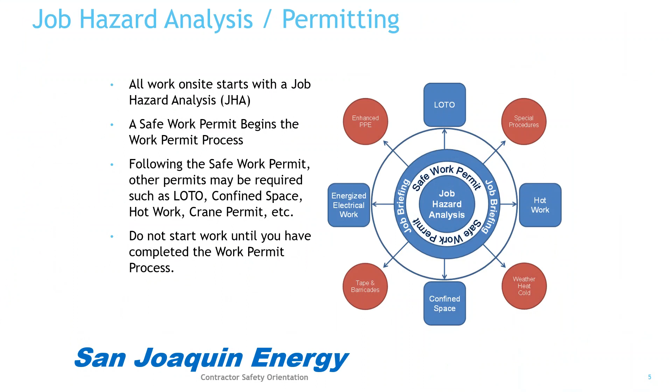Lockout-tagout. Do not operate any isolation devices that have a lockout-tagout tag on them. Only trained and authorized persons may perform and exercise control over lockout-tagout activities. Before starting work on any locked-out equipment, a representative from each contractor must sign on to the lockout-tagout.

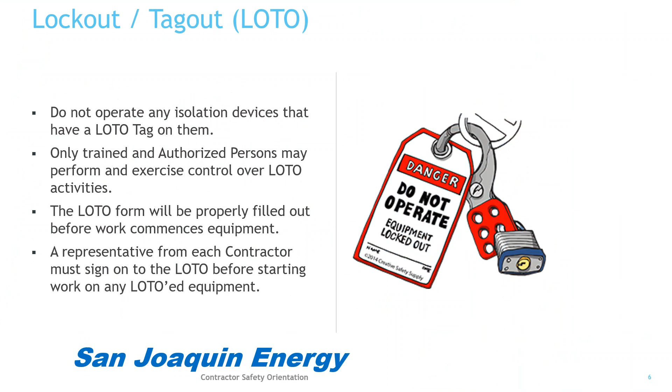Hot work permits. Obtain a hot work permit from the Control Room if the job requires welding, burning, grinding, or any other spark-producing activity. The permit is valid for a maximum of 1 shift or 12 hours, whichever is shorter. Review the hot work permit safety requirements before starting the work task.

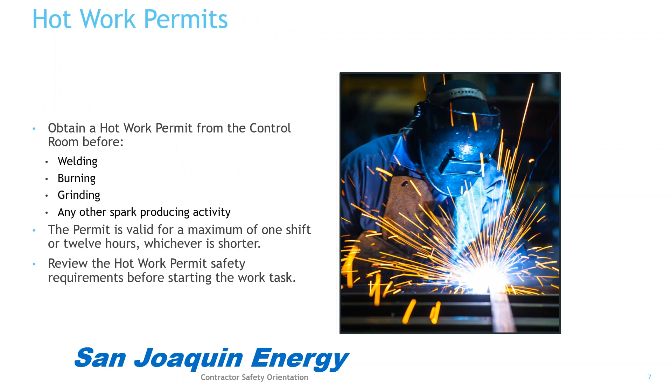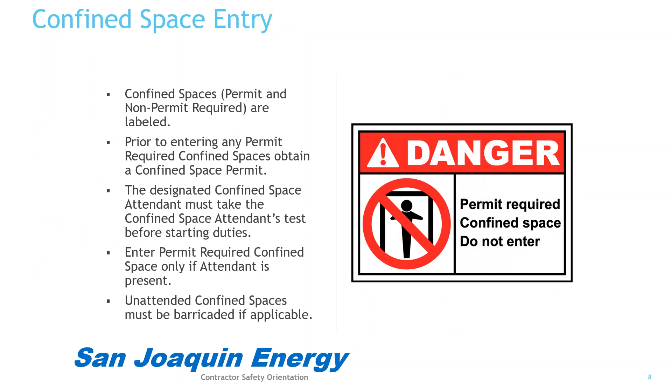Confined space entry. Confined spaces, permit and non-permit required, are labeled. Prior to entering any permit-required confined space, obtain a confined space permit. The designated confined space attendant must pass the confined space attendant's test before starting duties. Enter permit-required confined space only if attendant is present. Unattended confined spaces must be barricaded.

Personal protective equipment. Workers must provide their own PPE. Be properly trained on PPE. Use and maintain PPE in a sanitary and reliable condition. Workers and visitors must wear at a minimum the following PPE while in the power block: hard hat, safety glasses, steel composite-toed boots or shoes, hearing protection.

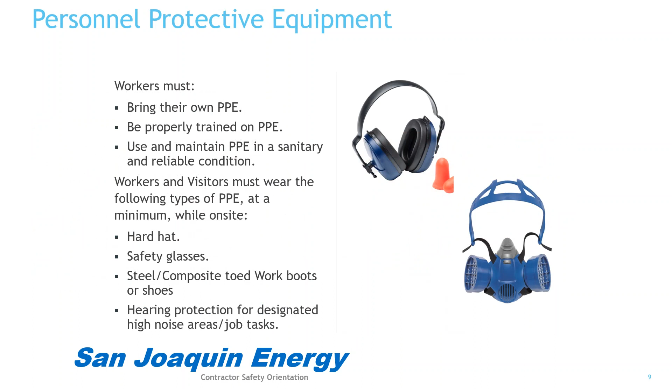Hazardous materials. San Joaquin Energy makes the following information available to workers: hazardous materials PPE requirements, access to MSDS, labeling systems for hazardous materials, emergency procedures, spill response procedures. Workers who bring hazardous materials on site must provide an MSDS to the Control Authority.

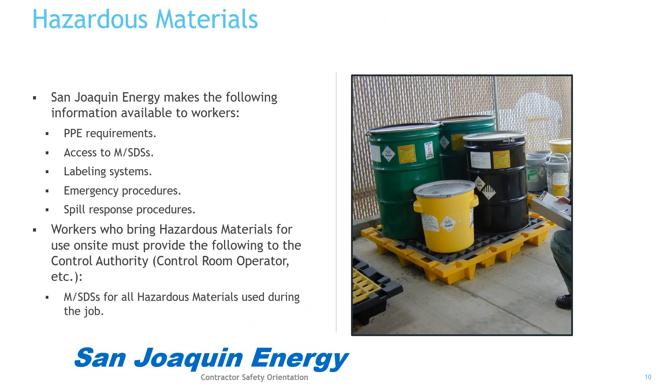Electrical safety. An energized electrical work permit is required for energized electrical work. Damaged electrical tools and cords must not be used. Ground fault circuit interrupters must be used whenever plugging into non-GFCI outlets. Tools must be unplugged when not in use. Electrical cords must be elevated off the ground whenever possible

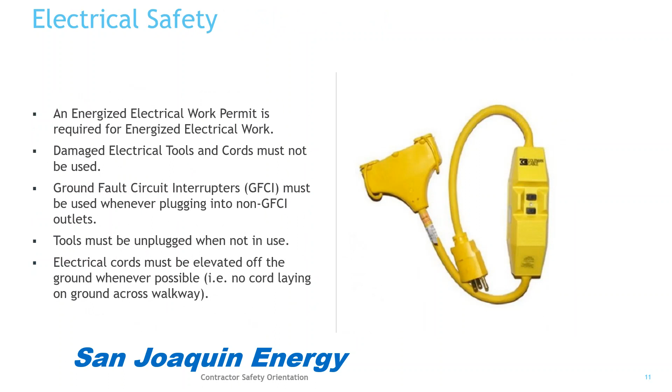to prevent a tripping hazard. Fall protection. Fall protection PPE must be worn when working more than 4 feet above ground if there is no guardrails or other built-in fall protection. Contractors must provide their own fall protection equipment and must inspect before each use.

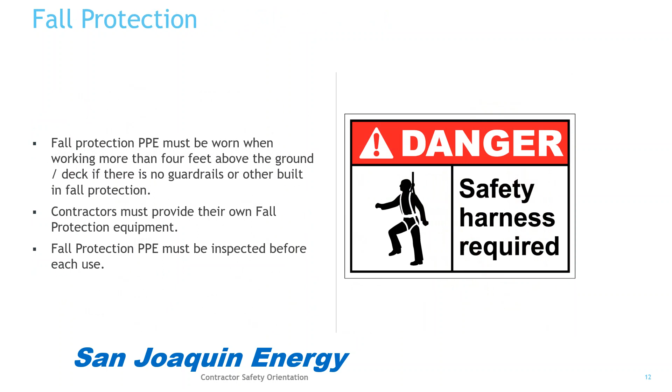Ladder safety. Only fiberglass ladders are allowed on site. Wood and metal ladders are prohibited. Ladders must be inspected before each use. They must be tall enough for the job, and ladders must be used properly. No standing on the top cap and rung, no overreaching, and maintain 3 points of contact when climbing.

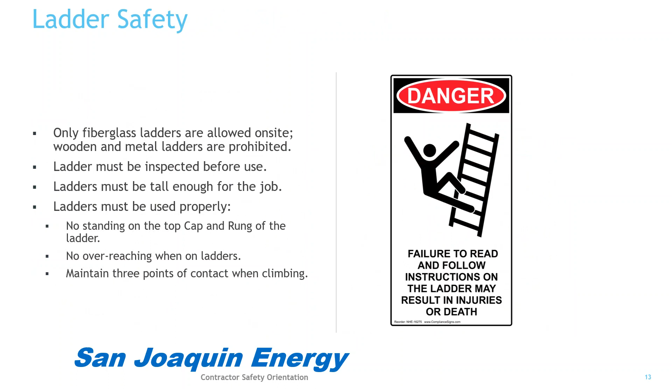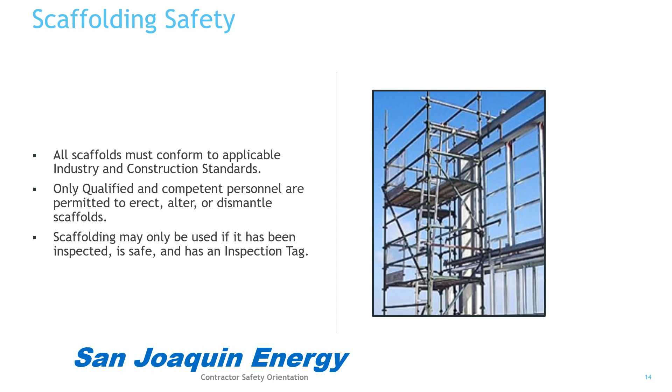Scaffolding safety. All scaffolds must conform to applicable industry and construction standards. Only qualified and competent personnel are permitted to erect, alter, or dismantle scaffolds. Scaffolding may only be used after it has been inspected, is safe, and has an inspection tag.

Safe lifting. When lifting heavy objects, personnel must not lift or carry heavy objects alone. Use appropriate tools for the job.

Barricades must be used to control access to hazardous areas. Red danger or yellow caution tape is used at San Joaquin Energy facilities. Barricade tape is a warning of a temporary hazard. Do not enter a barricaded area unless you are involved in a particular task and are signed on to the work permit. Identify what type of barricade may be required for a particular work task.

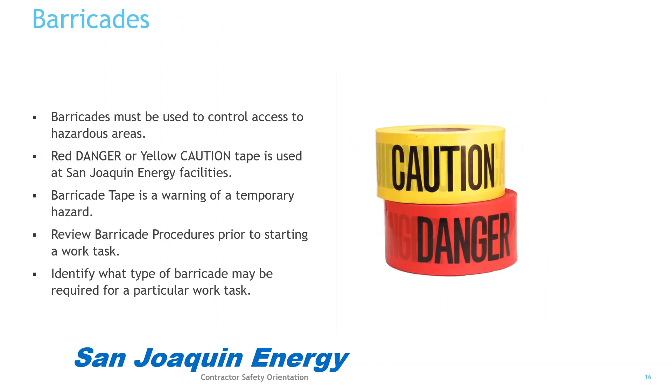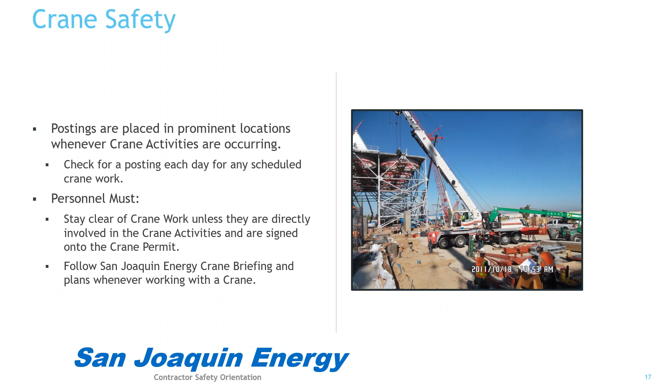Crane safety. Postings are placed in prominent locations whenever crane activities are occurring. Check postings each day for any scheduled crane work. Personnel must stay clear of crane work unless they are directly involved in the crane activity and are signed on to the crane permit. Follow San Joaquin Energy crane briefing and plans whenever working with a crane.

Mobile equipment. Non-San Joaquin Energy employees are not allowed to operate San Joaquin Energy-owned mobile equipment without express permission of San Joaquin Energy Management. Contractor-provided mobile equipment must be certified to meet all applicable regulations. Mobile equipment operators must provide San Joaquin Energy with proof of training prior to operating any mobile equipment on site.

Accident and incident reporting. All accidents, incidents, and near misses must be reported to the control authority.

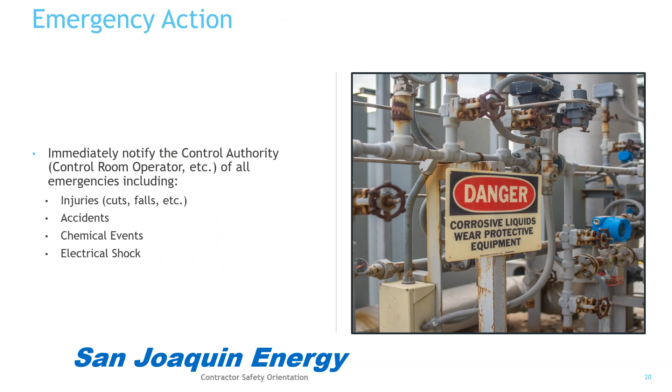Emergency action. Immediately notify the control authority of all emergencies, including injuries, accidents, chemical events, fire, or electrical shock.

Evacuation. An evacuation may be required in the following situations: fire or explosion, hazardous materials release, or bomb threat. An on-off repeated pattern from the general alarm horn indicates there is an evacuation required. Head to your site's evacuation muster location and follow instructions from San Joaquin Energy personnel. A continuous horn blast for 10 seconds indicates the alarm is clear.

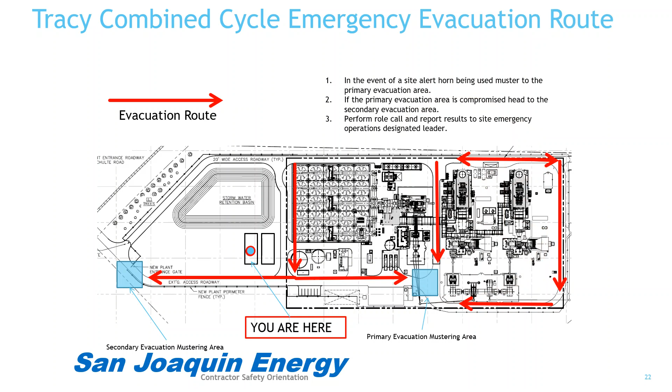First aid. First aid kits are on site and available. AEDs are on site and San Joaquin Energy personnel are trained in their use. Notify your supervisor and the control authority if anything occurs that requires first aid response.

Emergency procedures for chemical exposure. Be aware of locations of eye wash stations and safety showers in your area. Keep a clear path to eye wash stations and safety showers. Immediately remove contaminated clothing in the event of a chemical exposure and flush the affected area with water for at least 15 minutes. Notify your supervisor and control authority as soon as possible.

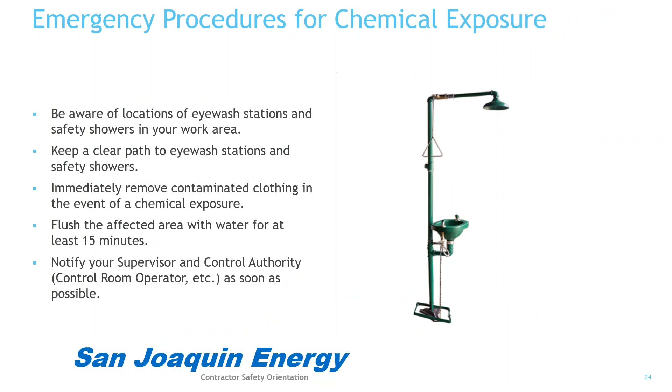Thermal extremes. Heat stress. Know the signs and symptoms of heat stress. Look out for your coworkers. Drink plenty of fluids and take short breaks in cool or shaded areas.

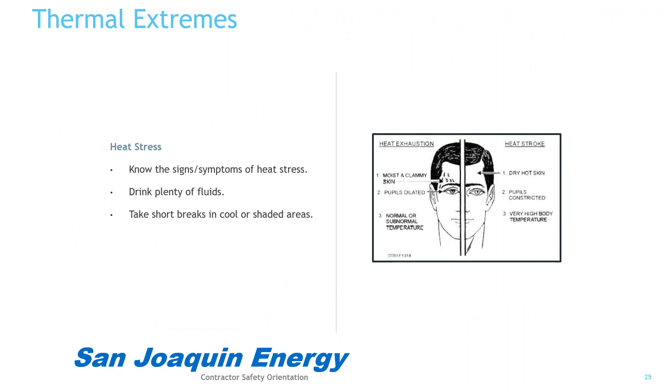Biological resources. San Joaquin Energy facilities are located within the habitats of protected species. Do not harm or harass any animals while at San Joaquin Energy facilities. Many animals that are protected look similar to non-protected animals. Assume they are all protected. Prior to removing any trees, bushes, or other plants, review with San Joaquin Energy Control Authority. Be aware of any hazardous animals such as rattlesnakes.

Housekeeping. Keep your work area clean. Remove debris and clean up any chemical or oil spills right away. Report all spills to the control authority. Do not create tripping hazards. Keep catwalks clear of debris. And do not block emergency exit paths, eye wash stations, safety showers, and fire extinguishers.

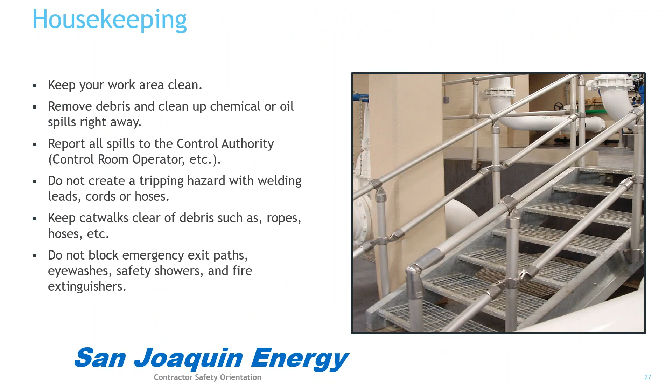California Proposition 65. Detectable amounts of chemicals known to the state of California to cause cancer, birth defects, or other reproductive harm may be found in and around this facility. If you have any questions, please let the control authority know.

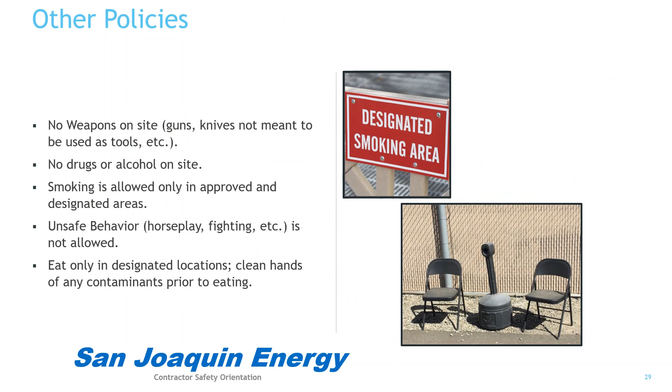Other policies. Do not bring any weapons on site. Do not bring drugs or alcohol on site. Smoking and vaping is allowed only in approved and designated areas. Unsafe behavior such as horseplay and fighting is not allowed. Eat only in designated locations and clean hands of any contaminant.

Questions. If you have any questions, please let the control authority know. Welcome to San Joaquin Energy.